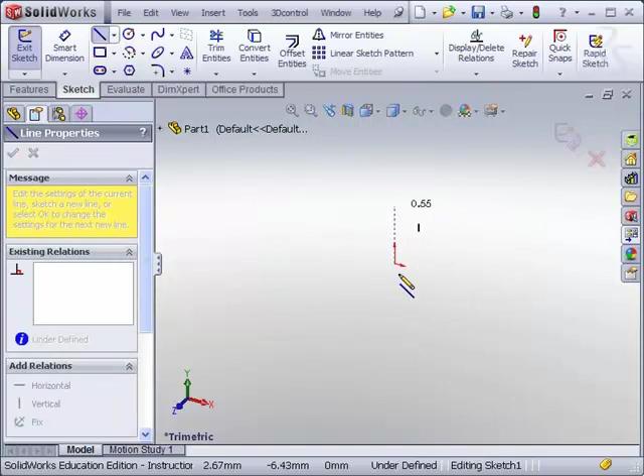Now the top plate I'm going to do by sketching. I'll start by putting a center line in the front plane, going right through the origin so I have that to work with for a symmetrical part. We'll look right at it from the front now.

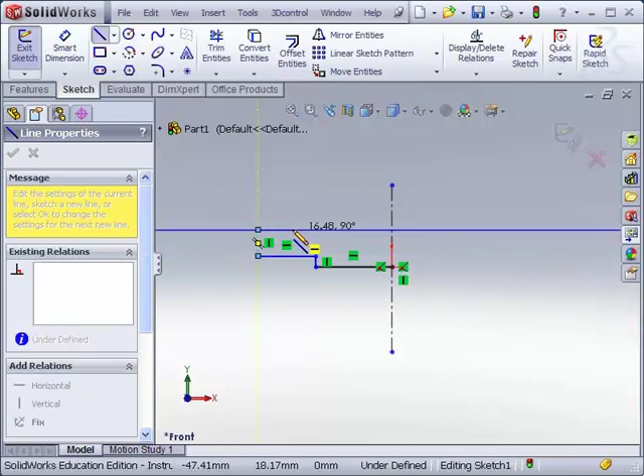I'm going to start drawing the top plate on the origin, go off to the side about 30 millimeters, which is about half the distance. Go up about 4 millimeters, go over approximately 20 or so, go up a little bit more, come back in, drop down, and then come back over to the center line.

Now what I'm going to do is mirror those entities about the center line, on the left hand side. I like it. I'll pick OK. Now I can start dimensioning.

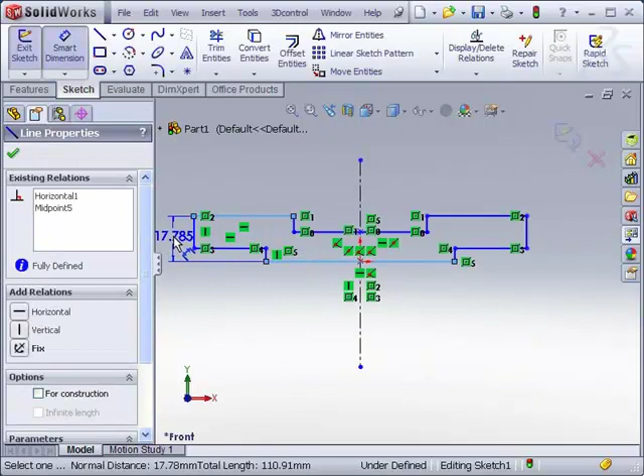The first dimension I'm going to put on here is the overall height. Bring it over here, call it 16, drag that over just a little bit. Then I'll put the overall width in place, put it up here. The overall width is 136.

Put that in place, and then I've got the distance from that edge to that edge. Notice I'm picking the edges, not the points: 44, because I want the edges to stay upright, even though in this case they would because of the way they were drawn. The depth from here to here should be 4.

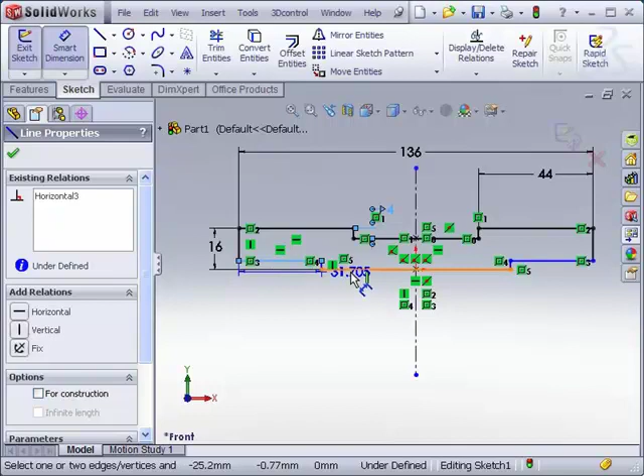The depth from here to here should also be 4. And then the width of the bottom part should be 60. At this point it should be fully defined.

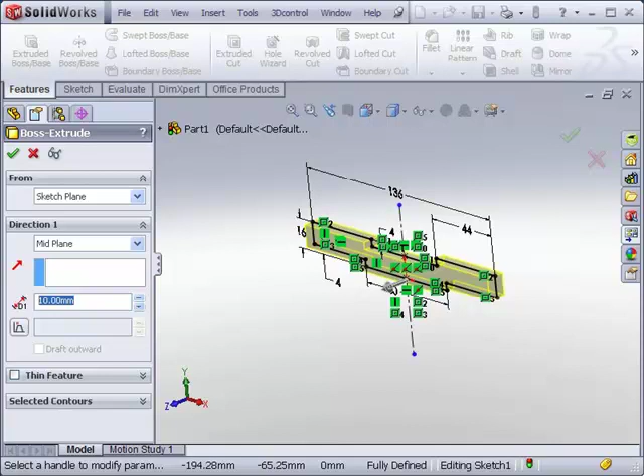It is fully defined. I get out of dimensioning, go over to Features, and do what's known as an Extruded Boss. I'll do a mid-plane extrusion so that origin stays right at the center, with a total width of 82 millimeters.

Now I'm going to put fillets on here. Those fillets are also going to define the location of the holes. One of the fillets goes right here, one there, one here, and one here. Notice I can select directly through. The size of, it's actually a round, but the fillet command is used.

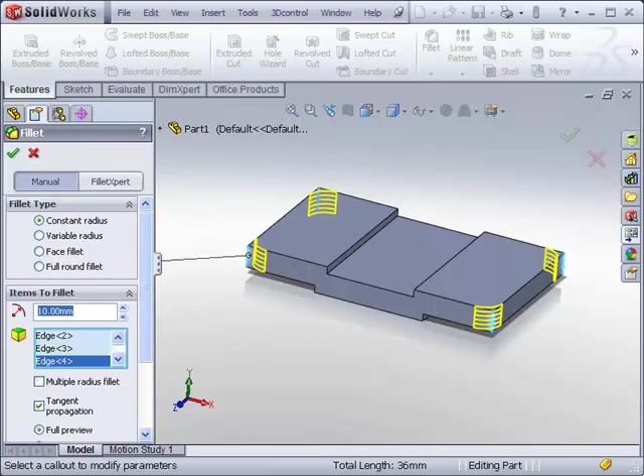Size is 12. Now I'm going to use the hole wizard. In 2009, you need to select a surface before selecting the hole wizard in order to do two-dimensional placement. You don't need to do that in 2010. Pick the hole wizard, and unfortunately it's going to think I want a hole in the spot that I picked.

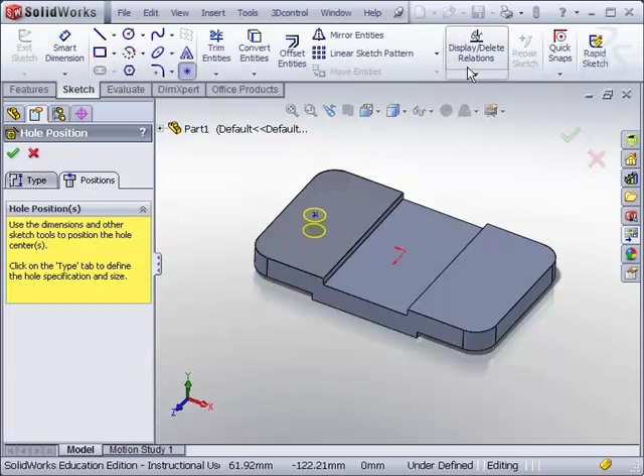That's not where I want it, so I'll go to Position, and add a relation between the center of that hole and that fillet right there, making them concentric.

Now I'll go back to the type and make it a drilled hole. It's going to have a size of 11, and it's going to go up to next so that it goes all the way through the part no matter what.

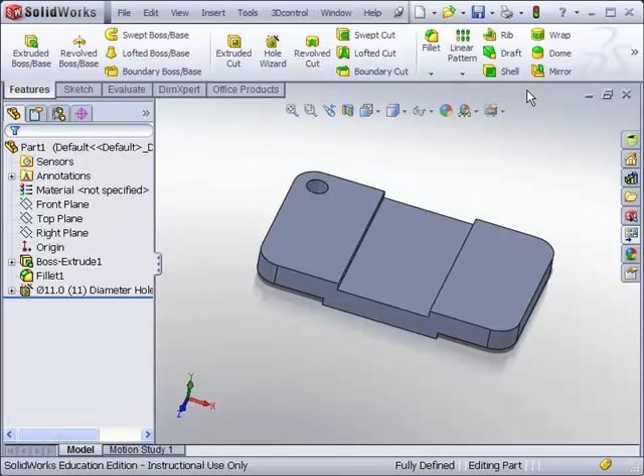Now I'm going to mirror, and my mirror face plane is going to be one of my planes, starting with the front plane. Because I did a mid-plane extrusion, it's able to use the front plane as a mirror option. Mirror that over here like so.

Go back to the mirror command. This time I'm going to use the right plane as my mirror plane. It's going to assume I want the last thing I created, which I do. Now I've got the top plate done.

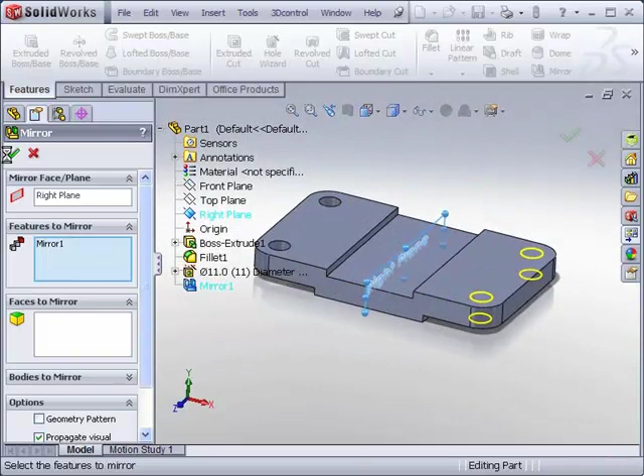Any changes to that fillet are going to change the location of the hole. Any changes to the thickness are going to bring that up and down. I didn't use the linear pattern because I wanted to make sure those holes got bigger and smaller as the part got bigger and smaller.